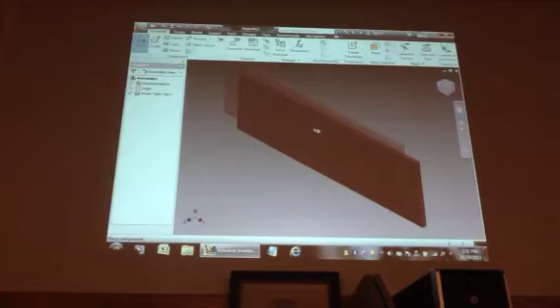In order to place an item, first you're just going to go over where it says Place. I don't even bother clicking on this drop down arrow because that can cause more problems, so just click on the top half of the icon. Then it's going to ask me what I want to place into my assembly. So what do I want to put together? I'm going to go with the brown tabletop first, and I'm going to zoom that out so I've got a little bit more room. Right click when you're done placing all the items that you want in there, and go to Create or Done.

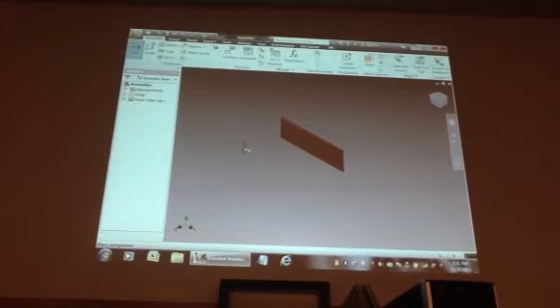Go back to Place again, and I'm also going to select a brown leg. Like I said before, the nice thing about an assembly is that you only have to make each part one time. You can place as many of these components as you want, as I am illustrating right here, into your assembly. Right click, Done, or Create.

Alright, that puts us to the next area where we're going to start putting these items together. You'll notice along the upper left side, this is your browsing history, right over here. There's a thumbtack right here. The thumbtack means that the item is grounded. Some of you have been grounded before, and you know exactly what that means: it means you can't do much. It's the same concept here.

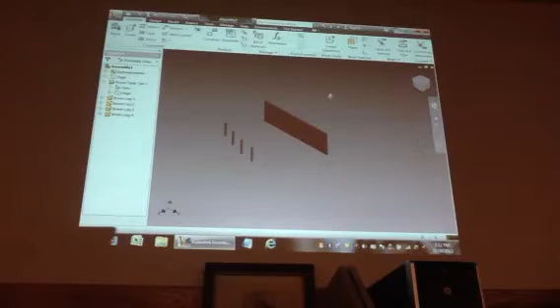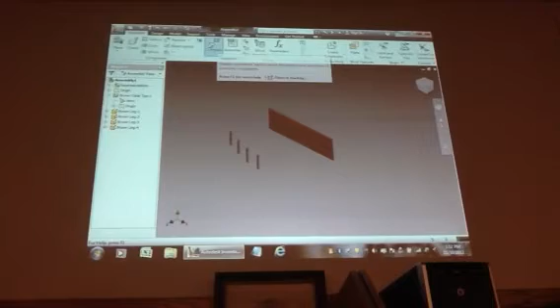The tabletop, in this case, is what is grounded. Look at this: if I click on here and try to drag it around, I can't do that because it's grounded. So that means all the items in this assembly need to come to this. So let's put the legs on. I'm going to use a constraint, which can be found right here. It gives a little bit of a description for you.

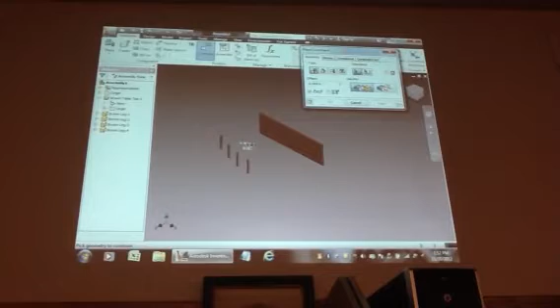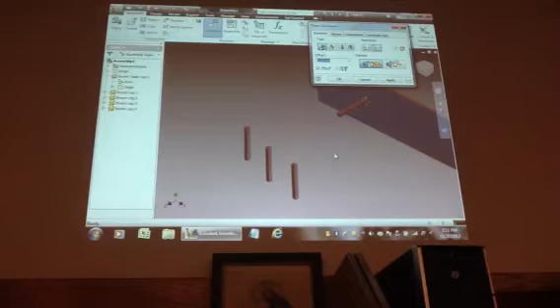You've got some options right here, this is your toolbar. The mate key is right here, and here's mate and flush. First thing we're going to do is just click on mate, and then we're going to zoom in. I want to mate the leg to the table, so I'm going to click on this top surface or face of the leg, and tell it that I want it constrained or mated to the tabletop. You can get kind of a gratifying little noise when it works, which kind of gives you an indicator that, hey, this is going well.

Make sure you hit apply after you do that each time. That's usually one of the common mistakes, kids forget to hit apply after they want one of these constraints done. The next thing I want to do is make sure that the leg is placed in the corner.

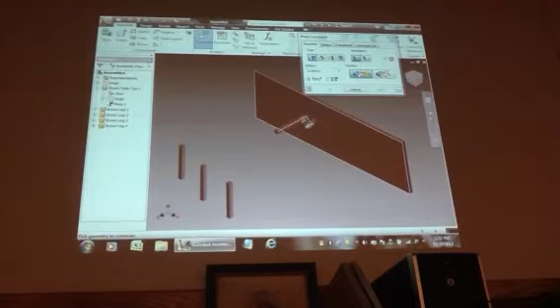I'm going to click on the flush button right here, and I'm going to tell the program that I want this side of the leg to be even or flush with this side of the table. As you can see, when I click that, it moves the leg up. Hit apply.

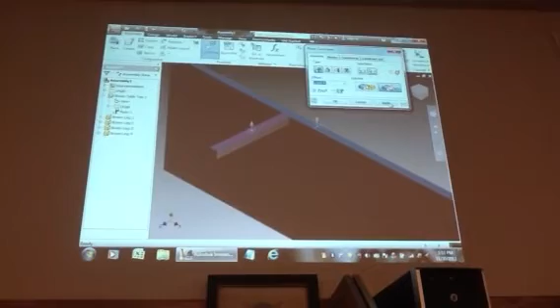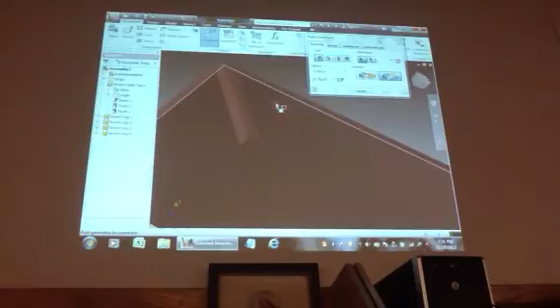Next thing I want to do is make sure that this side of the leg is flush with this side of the table. So I click here, and as you can see, you've got a nice uniform leg that's properly put in the corner of the table. Alright?

Make sure you go back to mate and you do the process all over again to put the remaining legs on the table. I'll do that real quick.

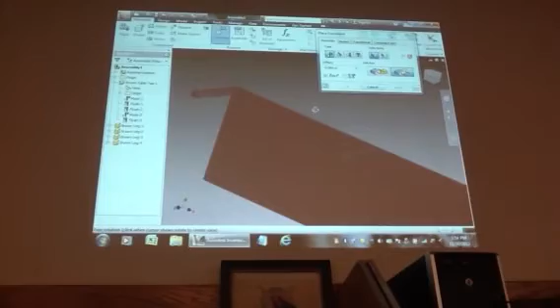Apply. F4 allows you to rotate the object. That's a nice little hint, because sometimes you want to come over here and use the rotation tool, but it's just easier to hold F4 down. Trust me. Apply. Back to mate.

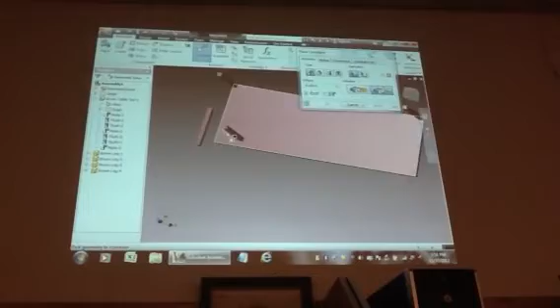Almost done, bear with me. Try to go as fast as I can. You don't want to hurry, but if you're good enough at this program, you'll get good enough to do this in a hurry. And that's my hope, that everybody in this class gets to the point where they're accomplished enough to do such a thing. So,

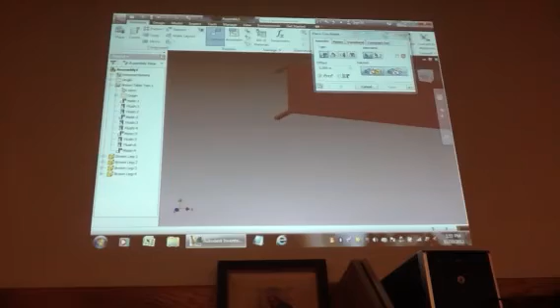Okay, almost done. One, and then last one. There you go. Last thing I want to do is rotate it around and see how it looks. Here's an isometric viewpoint of it.

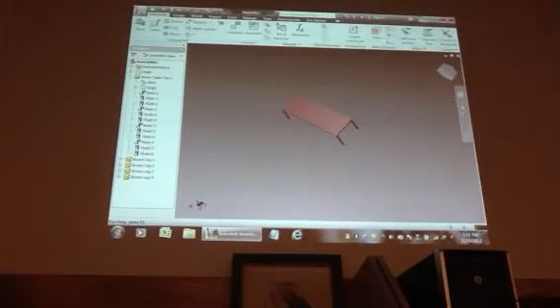I'm going to go ahead and save my item. Here's save. Okay, I'm going to call it finished rectangular table. And that is the end of the rectangular one where we use the mate and the flush tool.

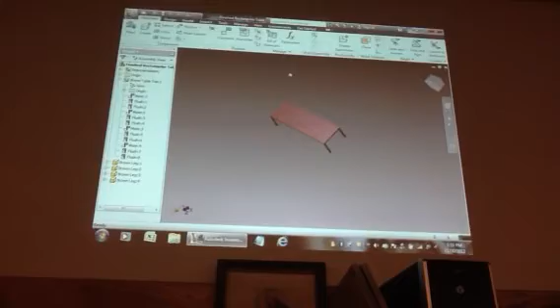I still would like to show you how to do the insert tool. So what I can do is open up a new assembly. Let me try and do that for you real quick. Okay, let me get some things in here.

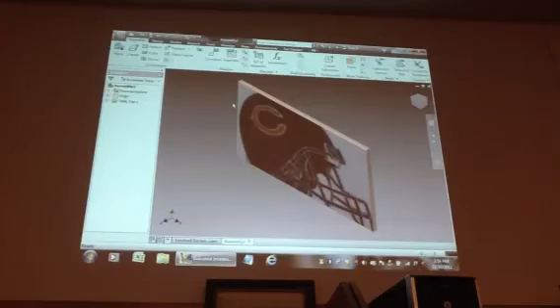Now I'm not sure if this is, yep, this one's got holes in it. Okay, I'm going to place a circular leg, peg leg, I think I called it. Alright, I'll just show you how to do that one time to save you some time.

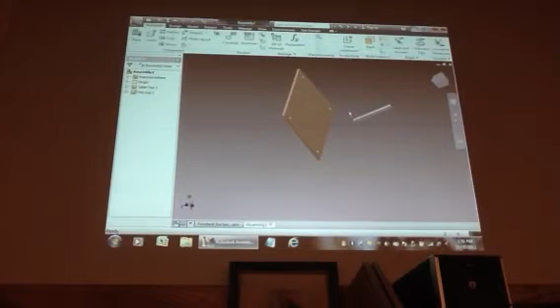I'm done. Okay, what you're going to do, and this is only for items when you're putting a circle into another circle, is use the constrain tool just as before, but the difference this time is that you're going to click on insert right here.

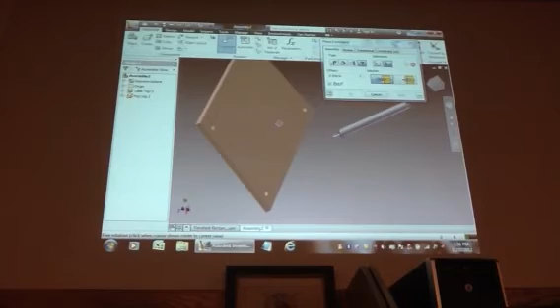What you will do is very simple: you will click one time on the outside of your cylinder, and then zoom in to make sure you place the item on the bottom side of the hole. It would do no good to insert the leg at the top side of the hole, because that's basically saying that the item is not inside. You want it in the bottom portion of the hole that was created.

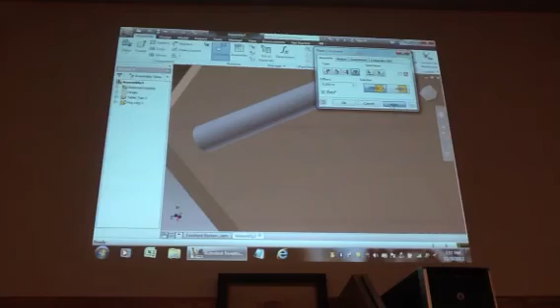So here it is. Click, and then apply. And if you have the other legs out here, you do the exact same thing. That is how you use the insert button.